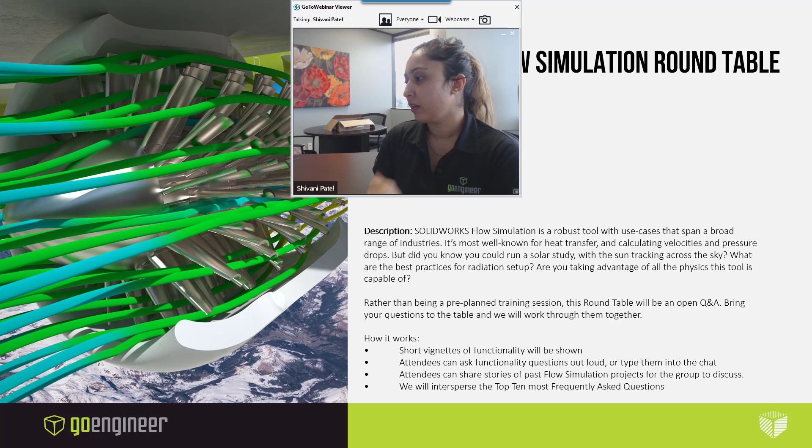Let's go ahead and get started. So there's kind of some options for you. So for option number 1, I've kind of listed out our common questions that I get asked before somebody owns flow simulation, after they own flow simulation, and then some various vignettes of functionality within the program, things that I think are less used but could be interesting to some of you. Again, these are just options.

So what I'm going to do is put up a timer for 1 minute, let you guys start typing into the chat and either voting on one of these 15 topics or typing in your own topic, and we're going to start from there. So because this is more of a loose type of webinar, it's not structured beginning to end. I want you guys to get what you came here for, get out of it what you came here for, so the more you put in, the more you get out, right?

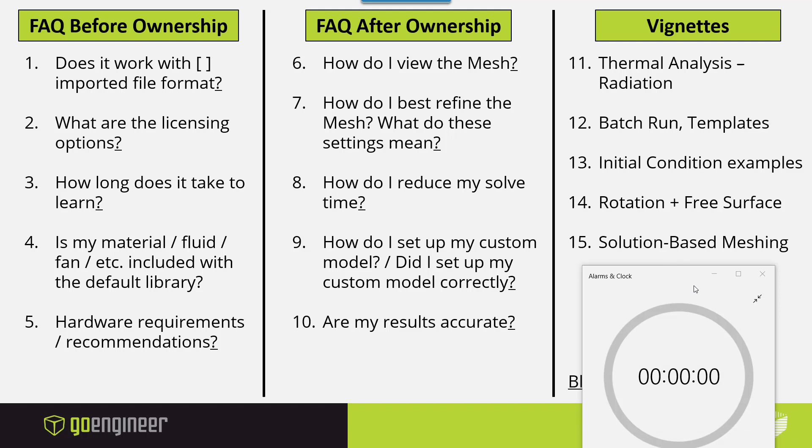Perfect, thank you guys. So we'll have time to do more of these votes after. That's not the only time you're going to be able to vote. Anyway, the one that seemed to win, a lot of them got only 2 votes. So we're going to start with the ones that got the most votes here. So I'm going to do 9, we'll do 10, things like that. I've got my tallies here. So, absolutely 9 is the one I get asked the most often.

I have this specific study. There's specific questions I have on it. I'm lost, how do I figure out if I set it up correctly? And because of how custom it is, really the best option is just to talk to me or another specialist one-on-one. Maybe you're not aware that you can do this, but you can schedule a session with a simulation specialist like myself.

So I'll take you to our website real quick. This is, you can navigate to it through our services dropdown or our support dropdown, application mentoring session. And that's getting you to this link that I've pulled up right here.

Now, if you're here and you're scrolling around, you're going to see that they each cost $250 for an hour. That's just to kind of put a wall between a random person who's not our customer being able to access this. Since you all were specially invited here and you are our customers, just reach out to the account manager that invited you, and they can get you either direct access to a simulation specialist or a coupon code for this to make it free.

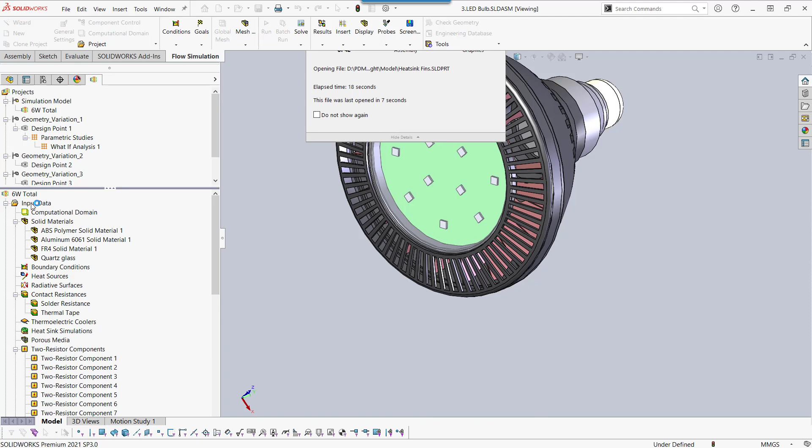So let's open up a project here. First our general settings. I'm going to right click on input data, go to my general settings, and walk through these with the customer, figuring out what do they turn on, what does that mean, what fluids did they choose, what materials did they choose, and then writing down how many times are they using something default out of our library.

What did they choose to ignore? Roughness 0 micrometer, right? What did they choose to ignore? What did they plug in? And helping them understand each of those assumptions in each choice, like black body wall as a default choice. What does that mean?

When you're doing this on your own, take advantage of the flow simulation help. A lot of SOLIDWORKS functionality is going to have this little question mark at the top right of commands, and that can get you direct access to whatever you're trying to reference. You can also go through the SOLIDWORKS help up here, SOLIDWORKS simulation, flow simulation help topics. You look up what you need to look up, you read through it, and that helps.

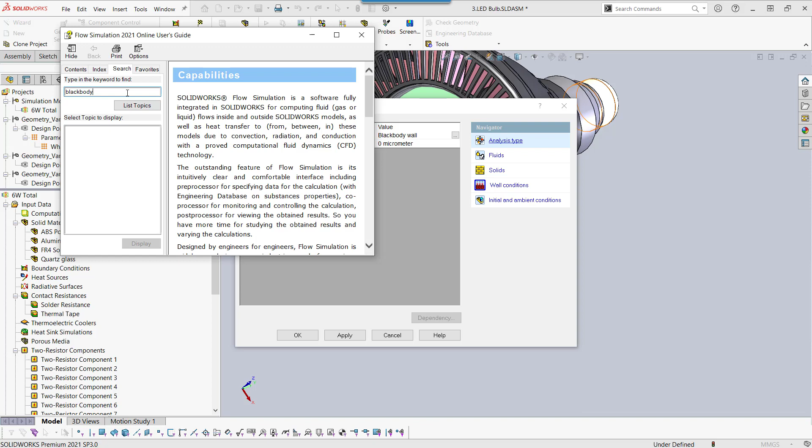Honestly, that's a great way to learn the program. What about this did I not understand? Okay, now I understand what they mean by black body wall, what it means when it's a default, that type of thing. Hey, not every answer is going to be in here.

That's where GoEngineer comes back in. If you are not able to find the answer you want in the supplied technical information, shoot us an email. You can reach out to your account manager, or our support team has an email and a phone number available on our website. You can find that here. So you can call us, you can email us, and if we can't directly answer it through some extra information that we have access to, we'll contact the Flow developers.

And that's how to check your assumptions, figuring out what Flow is actually doing. I think those steps will get you very far.

What's the next step? So after you check your assumptions, I mentioned... GoE support, okay, customizations. So what did you choose not to customize? What did you customize? If I'm concerned about what somebody customized, a custom fan, curves let's say, a custom material, custom fluid, I'll take them back to default.

And again, if you put in something custom, a custom fluid, a custom material, of course, whatever you put in, you put junk in, you're going to get junk out, right? So we want to make sure we understand what we're putting in. That's where the help comes in. That's where GoE support comes in. Make sure you understand what data you're putting in, and then interpreting your results.

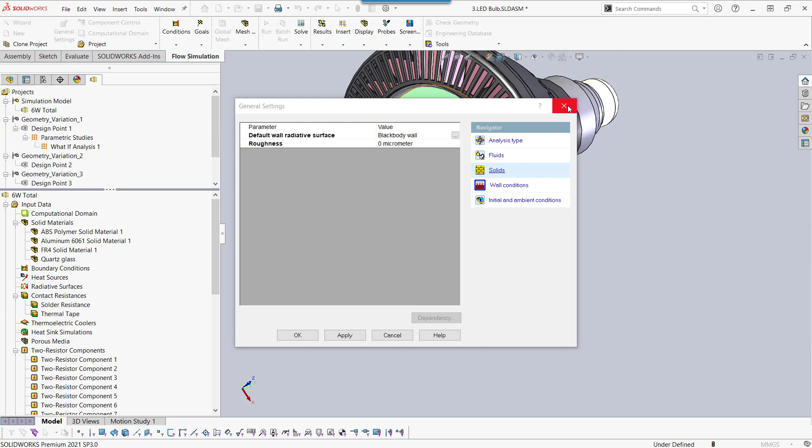So with that, I mean, are my results accurate? The best way to answer that is, well, you have to go through your assumptions and list them out. What do we understand? What do we not understand? If you don't understand something, you reach out to us. That's kind of the simple answer there.

And then making sure the materials that you type in, the fluids you put in, are the defaults okay for what you need, or do you need to go put in something truly accurate to what you're analyzing? So putting in those customizations.

The last thing, bullet point here I have is validation problems. So as you are getting used to it, if you're brand new to the program, Flow Simulation does come with a technical reference guide or an online tutorial guide, which can walk you through some standard setups. This can help with training, as well as proving out a concept.

For example, how does fluid flow react behind a cylinder? Kind of matching up with hand calculations, comparing that to the fluid calculations and how to set that up. Understanding how to do it properly can help you understand how to set up your custom model properly. That's validation problems.

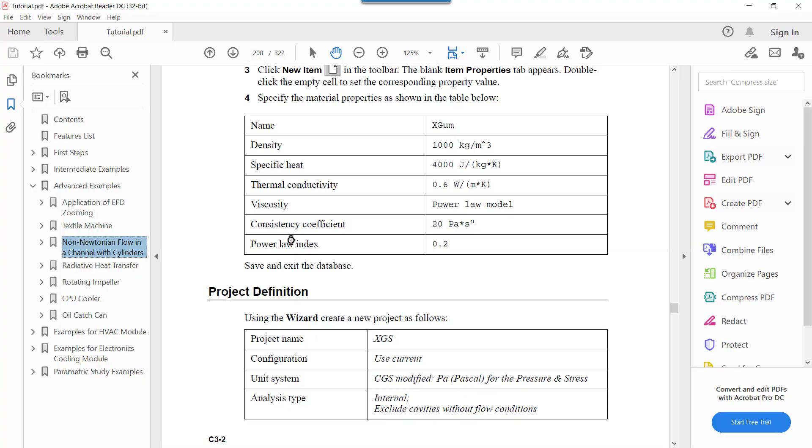Again, that's access to the help dropdown. Now, that's just some high-level answers, some specific answers, depending on what you're trying to analyze out of Flow.

This top right-hand corner, I can't show you the actual example because it's a customer example, but it's a thermal calculation with radiation. They did an experimental test with thermocouples on points of the model, and we compared that against a flow simulation study. You can see the range here is the kind of standard accuracy I'd expect when a flow simulation is trying to match a thermal analysis. We're in that 1 to 3 degree range, okay? That's what I'd expect to see from a thermal analysis.

If you're not getting it, of course, we're here to help.

Now, here in the bottom left-hand corner and at the bottom, this is more about lift and drag. We're talking about CFD, pressure effects, fluid flow effects—that's one question, but lift and drag is a very specific type of application. It's very reliant on the type of turbulence model that you have. So what turbulence model does Flow Simulation use?

When we're here in our general settings and getting to our last step, turbulence is kind of default chosen. It just says this turbulence intensity and length thing—turbulent energy and dissipation. If you searched that through Google, that would be called the K epsilon turbulence model. K epsilon is a really good general use case.

It's very stable. For lift and drag in particular, it's good for low to mid angles of attack. This has been tested against wind tunnel data, so you have some proof. This is flow simulation, by the way, on a drone, tested in a wind tunnel.

The coefficient of lift, our lift results, match very well from -10 to about 5 to 10 as an angle of attack. As you reach those higher angles of attack, where you have higher pressure gradients, we start to underestimate that lift. We start to lose track of the accuracy there.

Something else I want you to notice: drag. Our drag results tend to have a pretty significant deviation. By that I mean they'll match pretty well at very low angles of attack, maybe -5 to 5—pretty close. But as you get higher than that, you have a pretty big deviation. We're going to overestimate the amount of drag on the object, and that overestimation increases the higher the angle of attack becomes.

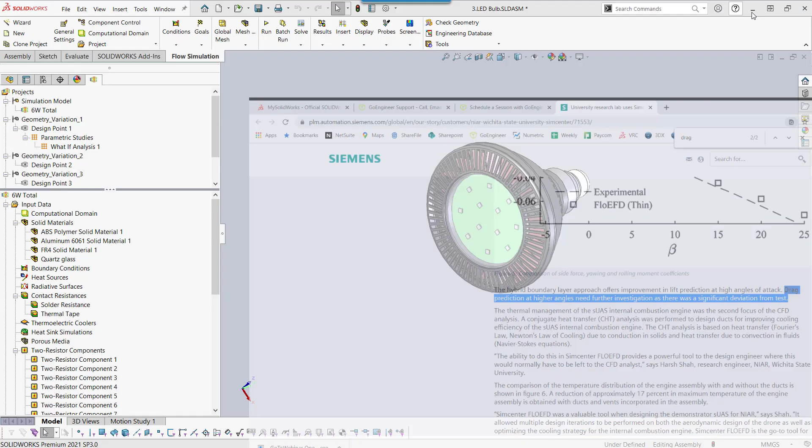Now, if you haven't bought Flow Simulation yet but you're looking at it, and your purpose is to get really accurate lift and drag, have access to a different turbulence model. Don't go with Flow for the K-epsilon. K-epsilon is great for low to mid angles of attack, right? You just saw that. But if you need something more specific, a wider range of uses, we have other options for you. That's not what this webinar is about, but know that we can help you.

Okay, that's the 'Are My Results Accurate?' topic. I saw some questions pop up—some custom stuff, environmental temperature, radiation, compressible, incompressible. Perfect, okay, so that's not related to the Are Results Accurate question. So let's go ahead and take a look at some of the custom questions that popped up, and then we'll get back into the standard stuff I went through.

All right, I'm going to just copy and paste some of these questions from our Q&A. Okay, thank you for holding on there. So let's start from the first custom question that came in: how do you model a pressure vessel being emptied? Okay, I'm going to show this to you from scratch.

The basic concept is something called free surface, and that's a type of physics we can turn on in Flow. The second component to this is taking advantage of the transient piece and initial conditions. And then we're going to do a shell—simple pressure vessel, and it's empty, like so.

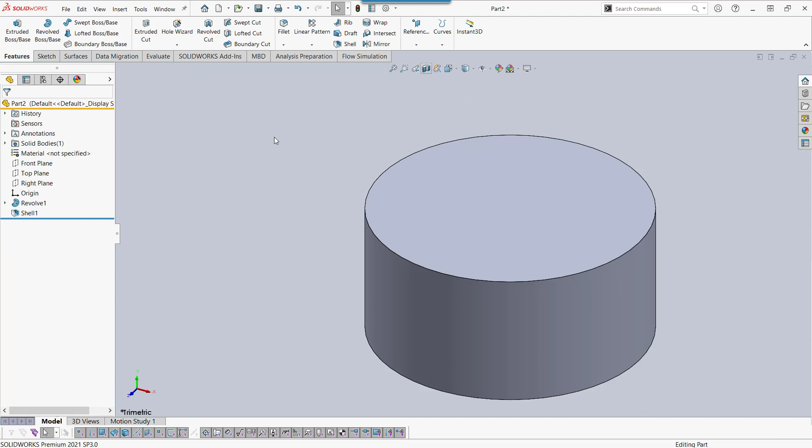So we have two ways to look at this. Either we have the whole thing filled with fluid like water, and then emptying at a specific flow rate at the bottom—we can define that flow rate—or we just leave it as an open channel, open air, and it's emptying like a bucket. Two ways to handle that.

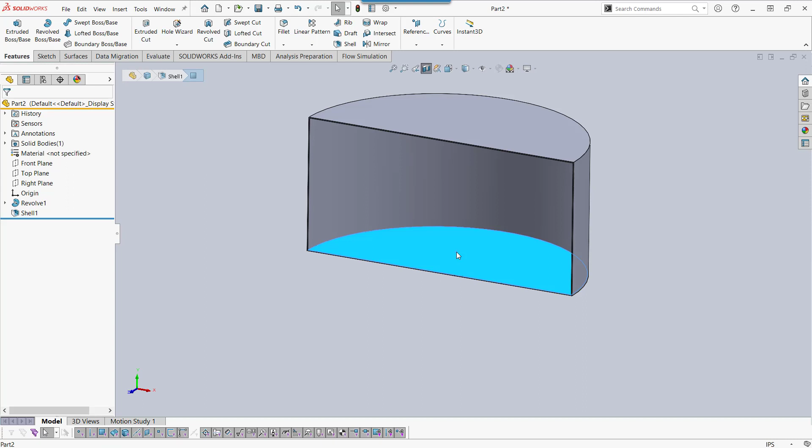If I was going to do the flow rate way, I would just have an opening like so. I would use a split line or some sort of lid to define where that outlet flow rate is—kind of like that. So initially filled with water, what's the outlet flow rate? It'll empty. Now the special part is needing that free surface condition where there's air and water in the same chamber.

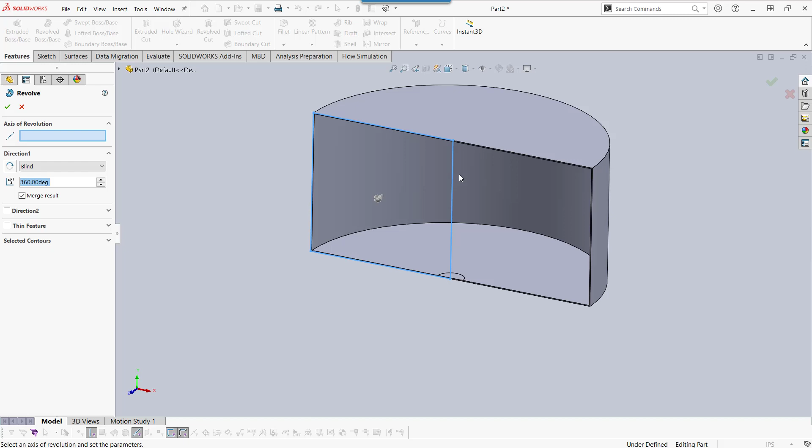So to finish up that, I'm going to create one more separate body to be the initial fluid of water. Yeah, we'll just do this—I don't want to merge the results. And just to make this obvious what I'm doing, I'm going to shift this downwards just a little bit, and make it a little bit shorter, so we have a little bit less water in the tank.

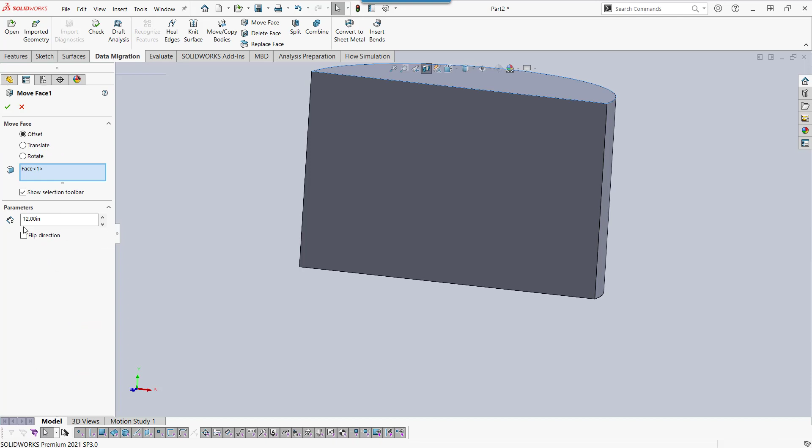Let's do 1 foot. The other way. Okay. All right.

Now for the setup, you go to Flow Simulation. I like to go through the wizard just because it's the easiest way to set things up, honestly. I've been doing it for so long, I still do it that way. Let's drop this to the desktop. Okay, so starting with the wizard, come on.

We're going to go through our 7 steps. Really the big thing is turning on the correct physics. So at the physics choice, with my current way that I set this up, I would call this internal. I'm just going to drain out into invisible space. External, you could choose if you actually had a channel opening, a cutout at the bottom, and it was going to flow through, okay? But internal, for now, just going to flow outwards.

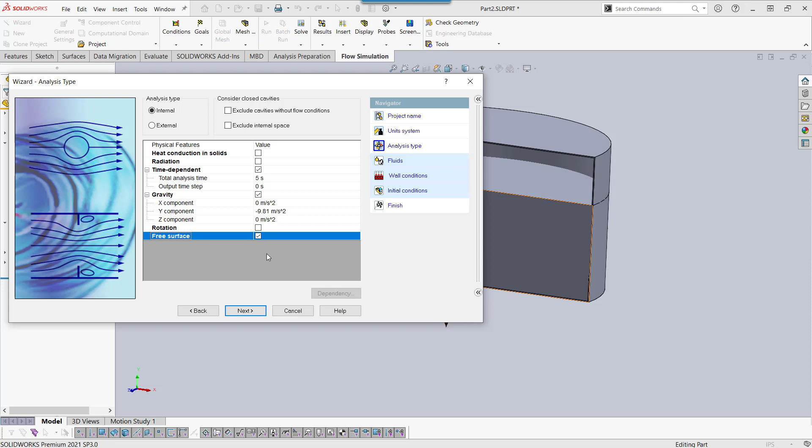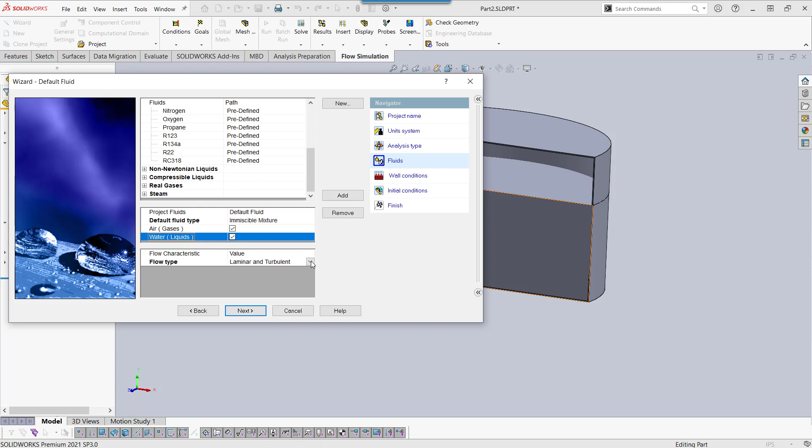This is what's going to allow you to have gas and liquid in the same chamber, air and water. Next, as I get into this part where I'm choosing my fluids, you need to choose a gas and a liquid, or a gas and a non-Newtonian liquid. That's the mixtures that we can do, or liquid and non-Newtonian liquid. So those are the 3 combinations you can have. You make sure you've selected both.

Kind of go through the rest of the wizard, doesn't matter as much this stuff. When you get to initial conditions, it's going to assume the air is the first thing, the gas is the initial fluid, and that makes sense. You want to leave it like that, you want it to finish, and right now it assumes just that little top gap area is air, and then this water thing is all solid, like metal or something like that. So that's not what we want.

So then you come into something called initial conditions. You can set that up from your project tree. I tend to use this tree a lot just because it's what I'm used to. You could also come up here, there's lots of stuff in the menu bar, right? So, initial conditions. So I'll drop that in. I would pick that whole volume to be my water.

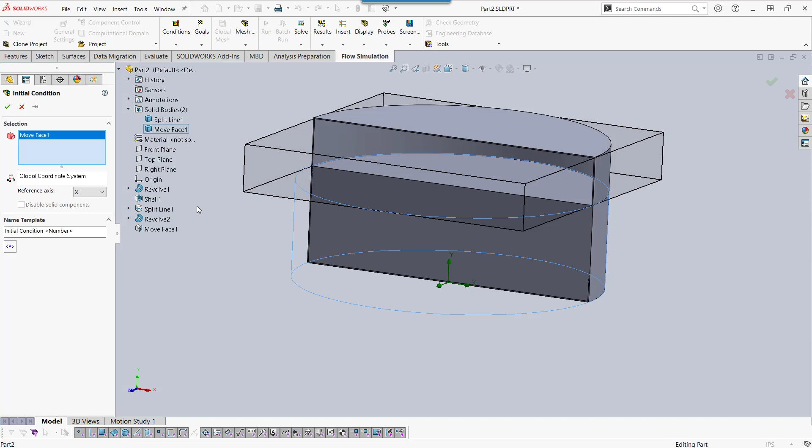I say disable solid components. That gets me access to all of the initial conditions that would be there for a fluid. So I'm not going to do velocity or anything like that. It's not traveling on a road. But I will say, hey, it's initially water. This is the initial pressure and temperature of the water. Turn on gravity effects due to the weight of the water, and good. That's great.

Now, my initial conditions for this vessel are partially filled with water, partially filled with air. And as I run the study, I'm just resetting this. As I run the study, it could empty. Really, the last step at that point would be doing a boundary condition. Whatever your flow rate or pressure is at your outlet, you'd go put that in at the bottom or whatever. Okay? That is how you would set up a tank emptying.

Environmental temperature is based on cloud cover. So you guys do a lot of solar analysis, or the sun's modeling, tracking across the object. Is there any sort of, what would you do for environmental temperature, right? Now,

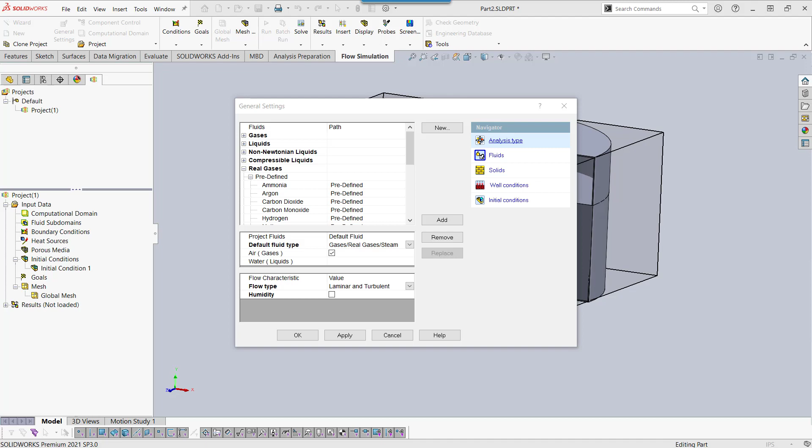So I'm looking at the questions while I'm answering. Let's look at these next ones in the list, and type in more if I didn't answer your question correctly, or ask to unmute, that's fine. So the next couple questions that came in have to do with contact resistance, when to use it. It seems to be built in certain scenarios. That's true.

Let's go back to this model. So two resistor components, they're not factoring in the contact resistance between the chip and the board, okay? They're only factoring in the resistance inside the chip itself.

Let's talk about what a two resistor component is. It could be a very complex shape, right? And we're simplifying this down into a simple rectangle with perfect touching faces and that whole shebang.

So when we're creating a two resistor component, we're putting in that thermal transfer, which is a combination of the conductivity and any other contact resistance that's inside just that two resistor component. So this is just about what's inside the two resistor component. If you're putting it in manually, yeah, you could include the glue that goes between it and the PCB. You're just simplifying your use case, but you don't have to combine it here, okay? So two resistor components, it's just what's in the component.

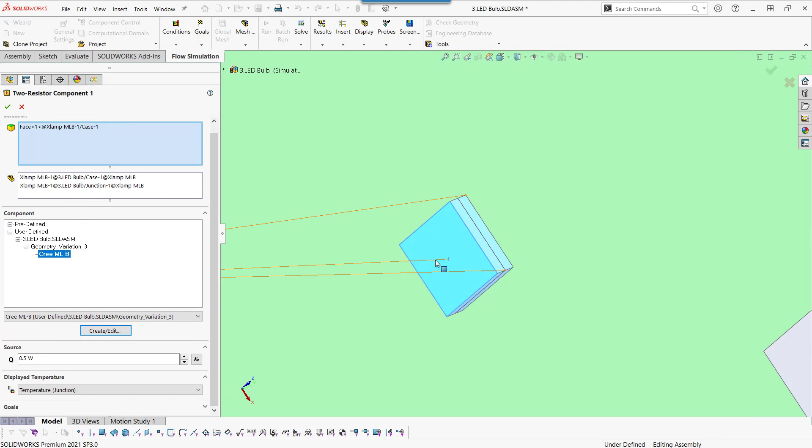For when you should use contact resistances versus, this is actually a twofer, a two resistor or a contact resistance versus a thermal joint. Those are the two options you have for telling flow how a part file is interacting with the part nearby. Contact resistance or thermal joint. Contact resistance is meant for when part files are face to face, they are touching, they are coincident with each other. That's when you use contact resistance.

And when should you use it? Pretty much anytime you have material data for what's in between two parts. I talked about that 1 to 3 degree accuracy on that thermal analysis we did. We made sure to put in contact resistance for all the big heat generating and big heat transfer components.

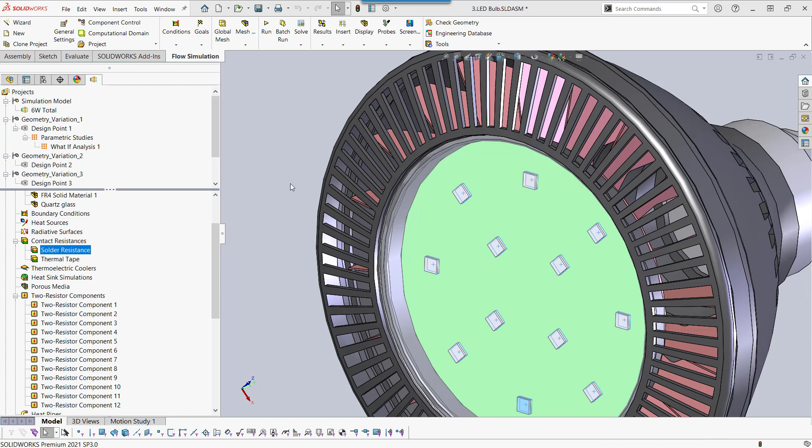As an example, do I have drawing tools? Let's leave that example to the side. So if the part files are touching and they are adding a lot of heat to the system or transferring a lot of heat to the system, I highly recommend you put contact resistance in. And again, they are meant for just the touching faces.

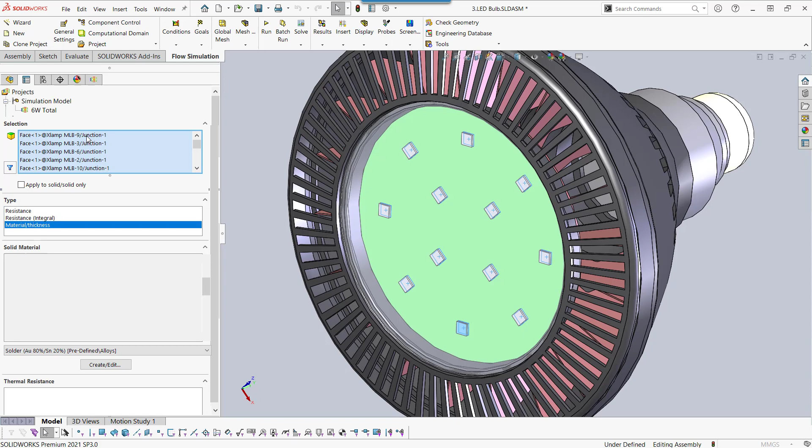Now, something I want you to notice here, at the bottom of these chips, I did not also click the face of the PCB, right? I just clicked the face on the 2 resistor component. Every face that you select in this tool, it's like it's being painted with the glue or the solder or whatever you put on. So don't select 2 faces between the components. By that I mean don't pick the 2 resistor component and the PCB, because now you're painting that resistance on twice. Okay? So just 1 face.

Now, when should you use the other option, the one I said was the other choice, thermal joint? If you look at that icon, it's 2 part files separated by a gap. So you should use thermal joint if you have 2 part files separated by a gap. It's going to pretend like there's a part file that you modeled in with whatever resistance or heat transfer that you supply. So thermal joint to represent a larger component you didn't model in, or a thin component you didn't model in, contact resistance for faces that are touching.

I guess the second question, heat transfer from a bolted interface. Let's say there's a diameter of that bolt. How to best model the bolt and make it easier to mesh. Rectangles, circles, similar areas for the bolt, that type of concept.

Okay, so if I think about a bolt, they kind of remind me of a via, a via on a circuit board. So there's kind of multiple pieces to this conversation. I'm going to start with the first piece. Let's just draw, well, that's not a rectangle.

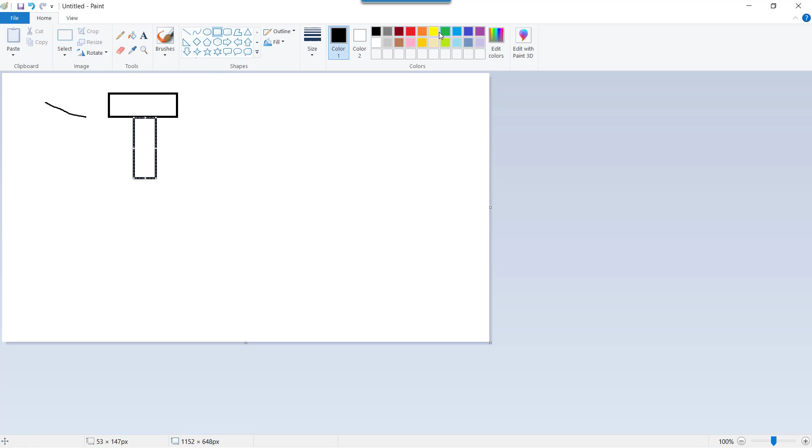Let's draw a bolt on a side view going through some PCB stuff. Maybe multiple layers, and then there's some part file down here, and it's either threaded into the bottom or a washer or bolted into the part. A via acts pretty similarly, connecting between part and part.

A simplified way to represent this without having to mesh it is using a thermal joint. Consider this a side view. Now I'm going to draw a top view, looking down on my board.

I would do a split line in the shape of the bolt, the diameter of that metal component touching the PCB. Then on the bottom view, I'd do the exact same thing for whatever that bolt is connected to.

Then with the thermal joint, I would connect this face to the bottom and tell it the conductivity of metal. That way you don't have to mesh the bolt. I've forced the conductivity of the metal here, like this.

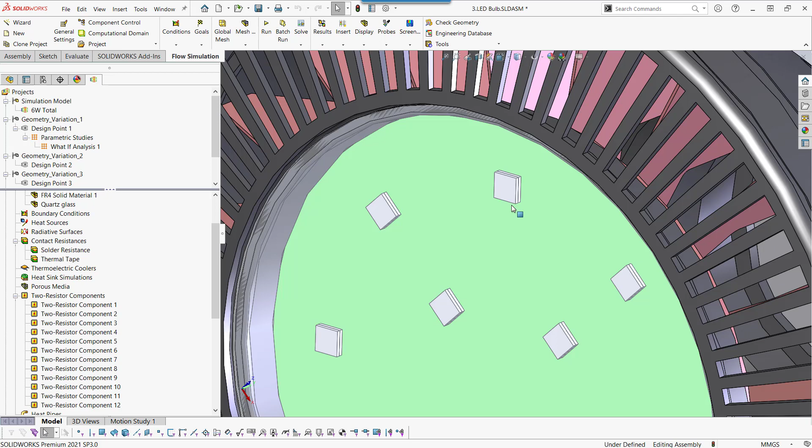Flow Simulation meshes square shapes better than round shapes. Round shapes will end up needing more mesh to capture the geometry. So if you can represent your bolt as a square instead of a circle, it will mesh easier with a lower mesh count and faster solve time. First recommendation: thermal joint. Second recommendation: square shapes if possible.

Someone asked a question relating back to the bad tank I drew, with the water overlapping the edges of the tank—is that going to be a problem? In this case, no. It just matches the solid level exactly, so it's not going to try to inject water into the solid body at all, so overlapping is fine. Flow Simulation is pretty cool with overlapping stuff in general. If I had it sticking outside a little bit, that would have been the problem—it would have flown off into space and been confused. So overlapping is okay in this case.

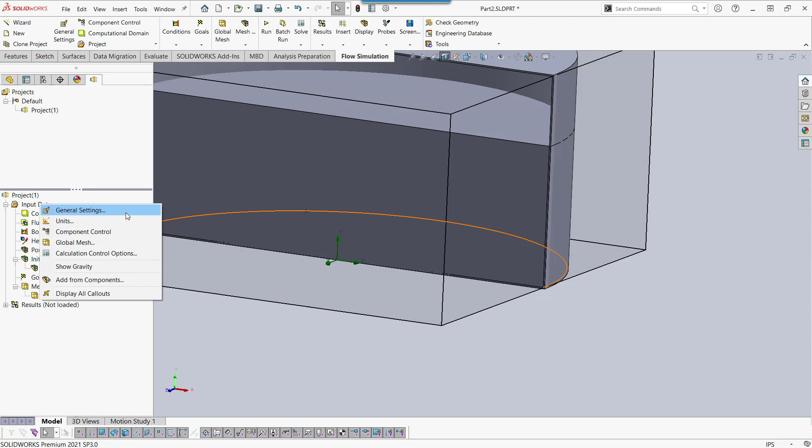Another question, I think going back to the cloudiness question: is the environmental temperature different from the ambient temperature somehow? No, there's really only one place you can put in an environmental or ambient temperature, and that's here in your general settings. You put it in here—that's your environmental or ambient temperature, and that's the same thing.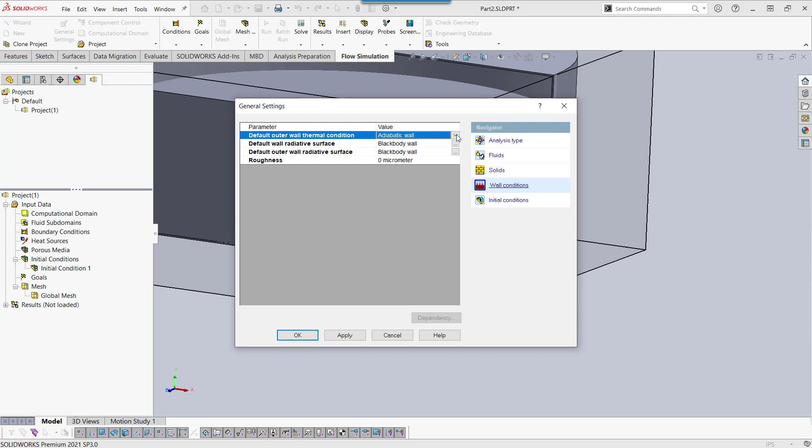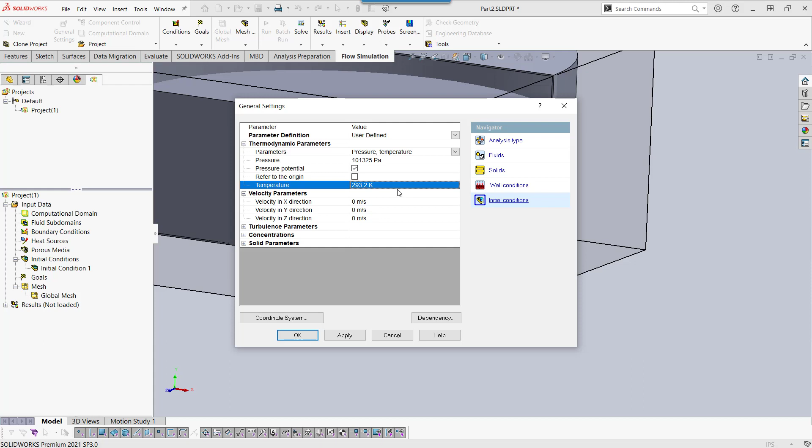I wonder if there's some other temperature you might be talking about. Let me come back and look at the solar study again. I don't see a place I'd be overriding this—maybe here, but that's the same thing. I believe you're talking about this area of the general settings and the environmental temperature. This is treating this as the ambient temperature, the environmental temperature—all the air around the object, anything that blows in is going to be that temperature. I'm not sure if I answered that one, but I'll watch out for more questions related to that.

Let's do a faster one, and then we'll get into these custom ones. We had a couple of votes for the vignettes. So a faster one: does it work with whatever imported file format?

The most common question I get asked is whether it will work with some other CAD modeler or program that I have. Usually the answer is you're going to have to import that as a STEP or IGES file. The nice thing about Flow is it's just in the SOLIDWORKS interface, so whatever power SOLIDWORKS has to import a file type, Flow Simulation can use it—it just has to be in the program. So the question really is, can SOLIDWORKS import it? If your question is, can Flow use some blank file type, just see if SOLIDWORKS can bring it in and make a solid part out of it. Generally that's STEP and IGES—STEP or Parasolid is preferred.

A lot of people are using Flow Simulation for electronic circuit boards, PCBs. There are programs out there like Altium that have direct connections to SOLIDWORKS, and they can also export step - I've seen that in action, so that's always an option. With Altium, there are connectors called PCB connectors, where your geometry inside Altium can connect to your geometry inside SolidWorks. If somebody makes a change in one or the other, the program can be updated, so it's all like a live connection. But same thing, you're kind of working with SolidWorks part files as well. Just another option for connecting that data.

It's when you have surface bodies. When you import a step file, you can have an issue where not all the geometry gets imported properly. So the step file brought in, but there are some errors - you can see that here on the left-hand side. Let's focus on what's going on here. I've got solid bodies, which is that piece - that imported properly. It's a 3D solid, it has volume. I could technically run flow simulation on this.

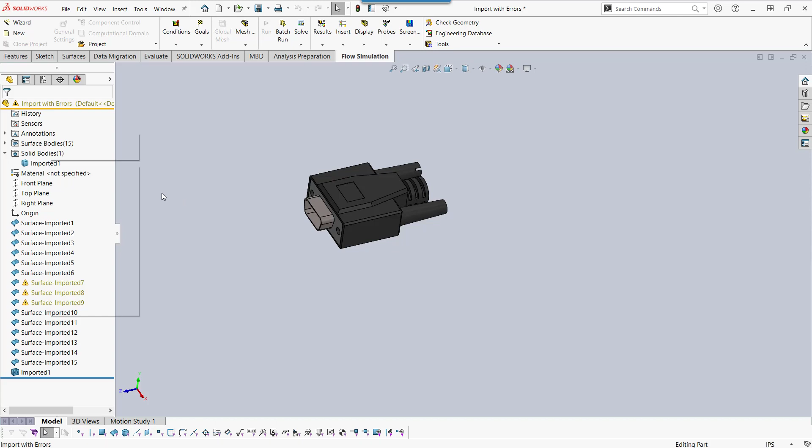Now the other pieces broke during the import, and they're surface bodies. I know that because they're under the surface bodies folder. I also know that if I isolated one of these components or bodies, they're not going to have any thickness. They've got these blue edges by default - no thickness. Flow simulation has no idea what to do with a part that has no volume, so it's going to completely ignore it. It can't mesh it, it can't do anything with it.

What are good ways to learn the software? That's a different version of this question, number three, and that's kind of what I was leading towards with this one. So let's focus on how we would learn this. Let's start with what's available to you right now that's free, that you don't have to pay for.

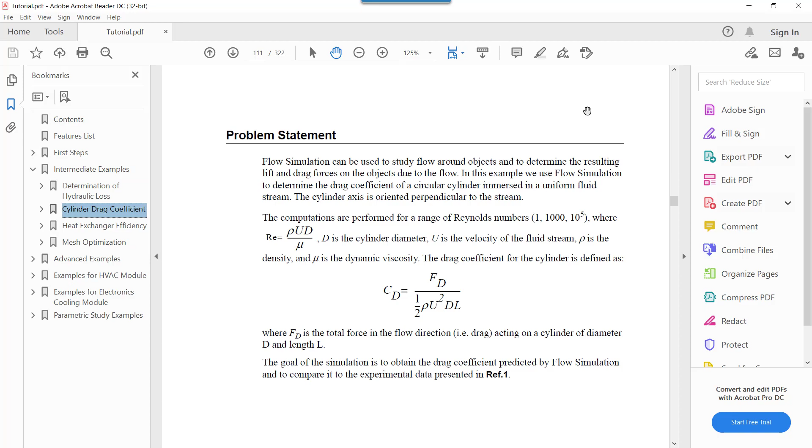Starting with tutorials - we had talked about this before. You go to Help at the top right, SolidWorks Sim online tutorial, and that's a very long PDF with 15 to 20 examples. The part files come pre-downloaded on your computer. You can walk through them, get a baseline understanding of flow through this. It's plenty to read as well - they're going to explain why they're doing what they're doing plenty of times throughout the process. That's background info, piece number one.

I will say that when I first learned SolidWorks, I was going through tutorials, and it didn't help me that much just because it was so perfect - perfect little examples that I followed instructions for, but it didn't help me understand what do I do when I have this custom situation come up. And that's where Crash Course comes in.

Let me not forget my.solidworks. So my.solidworks is SolidWorks' database of free training material. It was the SolidWorks forums, which are now accessible through a different portal, but they are here as well, where you can ask the community questions. It's another free resource. To get access to more information, I recommend you create a login - you can have a login for free, it doesn't cost you anything. There are different levels, you could pay for higher levels, that is true, but you can certainly have access to the free stuff with a login.

Now what you would do is you'd go to training, and you'd search Flow Simulation.

I can see I've got 10 lessons and 1 learning path to teach that program to me. Let's go to the learning path. The e-course costs money, so let's go to the learning path instead.

This is made up of 10 lessons. You could go top to bottom. That's supplied to you as long as you have a login. You can watch them; that's about an hour and a half of training. It's kind of a crash course, enough to get you dangerous with the program.

Let's go back here. My favorite way to explain this is through one of our training files. I'm going to pop up this regulator valve. This is a valve—it has a perforated cylinder through the center that's going to regulate the flow rates. That perforated plate at the center has a varying range of holes, and because of that, some of the holes don't get captured correctly when you do the default mesh. So how do I view that? Let's first do a section view so I can show you what that looks like.

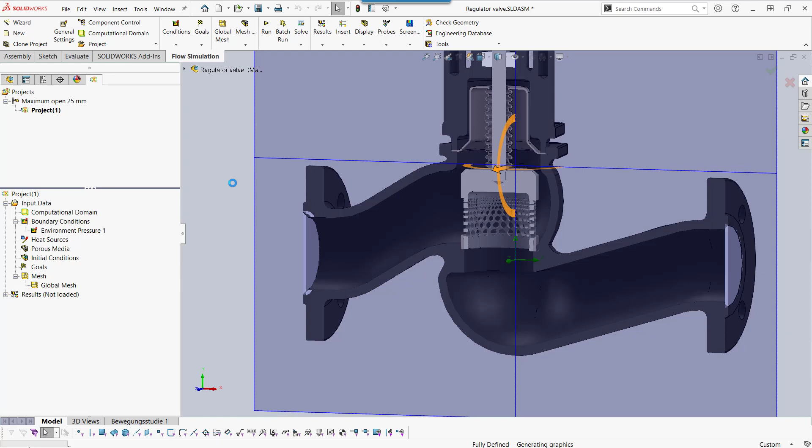Okay, so lots of holes going on here, flows going through. I haven't run this project—I don't need to do that to view the mesh. All I do is right-click mesh and say create mesh, and that generates the mesh file with whatever settings I have by default. Now that I've generated it, how do I look at it?

Well, I want to make sure the mesh is good through this component. In my results area, I've got two ways that I can look at that: this mesh area and cut plots. Let's start with mesh. Insert.

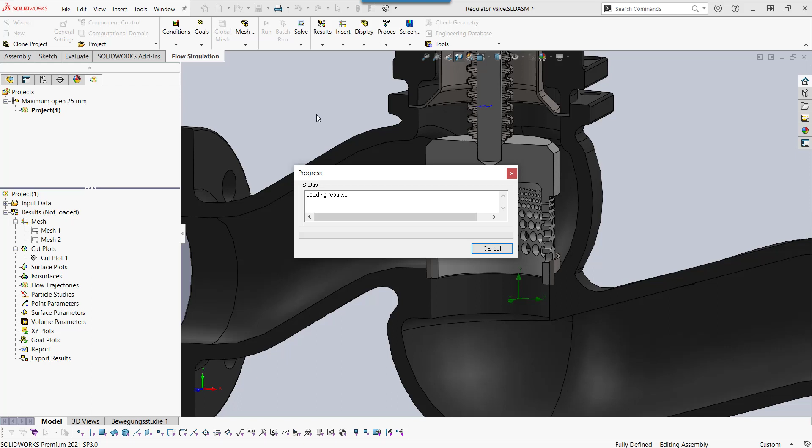This one has a requirement—you've got to select surfaces. So I have to select a surface of my model like this. I cannot go through and select some standard plane like a front plane—just can't do it. I can only do surfaces of the model. I'll go ahead and hit OK. I need to load in my mesh, and show you what I just generated. Okay, let's try this again. Insert.

On my surface... okay, a little bit choppy looking. Let's do a cut plot or a section cut as well, crop region, that way I can see a little bit clearer what I'm looking at.

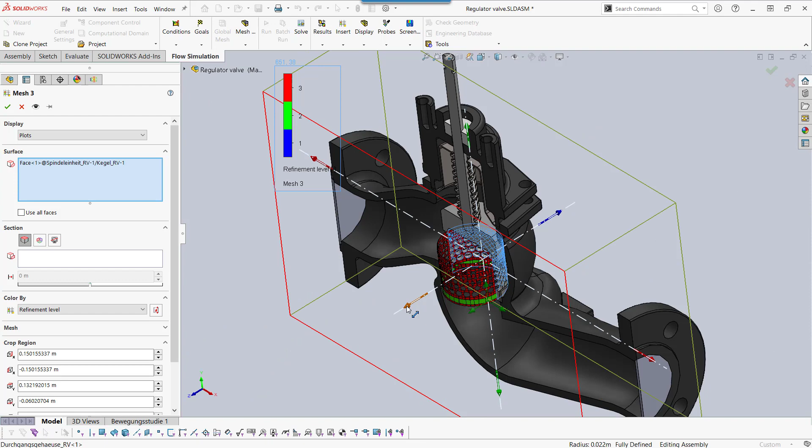So you can do this to your plots. You can always crop them to make them easier to understand. Okay, so what is this plot telling me?

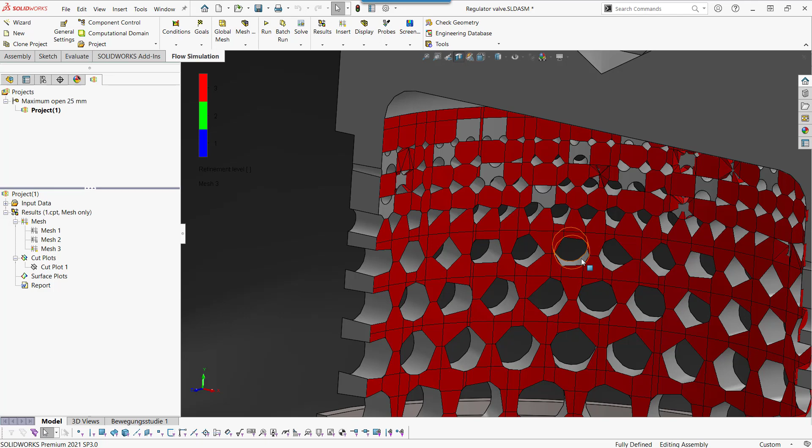Well, if I'm looking at the way the holes look, they look pretty terrible. This is saying this is what the flow simulation solver sees. This is what the mesh looks like around those holes. It didn't get small enough to capture the small holes at all. Pretty chunky looking.

There's also a gradient here, refinement level 1, 2, or 3. There was some automatic refinement that happened that just pulled up in my default settings, and so some areas are 2 times refined or 3 times refined. What does that even mean?

We'll get to that. Now, what's the second way that I could view my results? Cut plots. This is the next most common way you're going to do it. You're going to pick a plane or a face, and this is the way you choose a plane, because in the other type, you can't do planes.

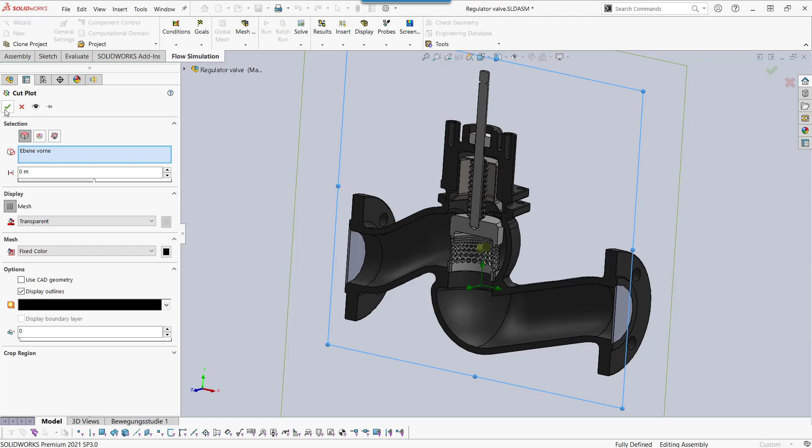And remember, this is that thing I told you to, please don't forget this part. Uncheck use CAD geometry. It's in your options. Uncheck that. That's going to tell you what the true mesh looks like, how flow simulation is actually seeing the part file.

Let's focus on this area. That's definitely a funky geometry. I'll hide some stuff.

Okay, look at that a little bit closer. It's not terrible, right? But you can see the chunkiness around that kind of smooth, curved geometry. And so that's another clue that that geometry didn't get captured well. And so then my next step would be refining the mesh in some of these areas.

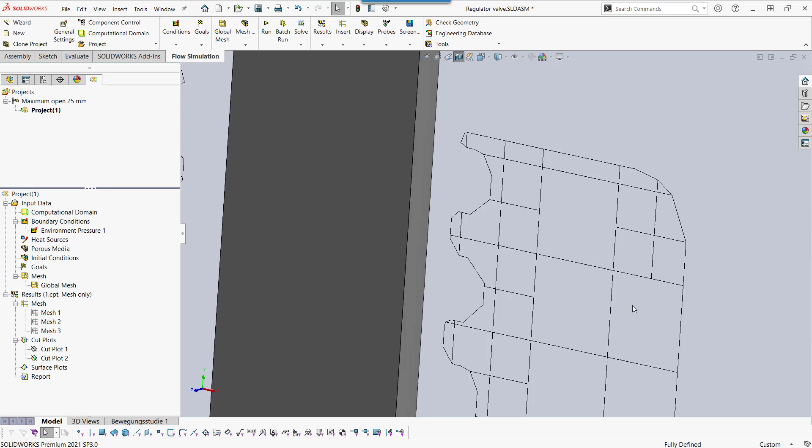So getting into how to refine it. Because that's really the two ways to view it, and that really handles that first question. So how do I then refine it? Let's go through some vocabulary first.

Okay, basic level vocabulary. A mesh inside of FlowSim is a big cube. Level 1 or level 0, just some big old cube around the object. You can kind of see that here in this picture. When you go to level 1 or 2 or whatever, it carves that cube up into 8 smaller cubes, just divides it in half a couple times. You get 8 smaller cubes.

So very quickly, you can blow up your mesh size. So we don't want to throw this all the way up to 9 immediately, pretty much ever. We want to be careful with what we're doing. So that's basic level vocabulary there. So let's take that knowledge into making the mesh better for this little piece down here.

Okay. Meshing. So I'm going to right click on mesh and go to insert local mesh.

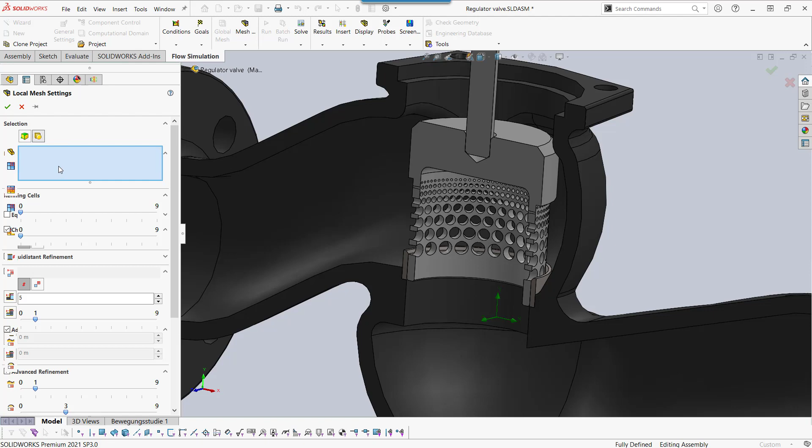Here you have two options. You have this first icon, which is telling me I can select components, faces, edges, or even a single point to apply all these settings to. Then I've got this one, which is you create a Boolean shape around your geometry, either a cube or a cylinder or something, and then again set up all your settings inside that Boolean shape.

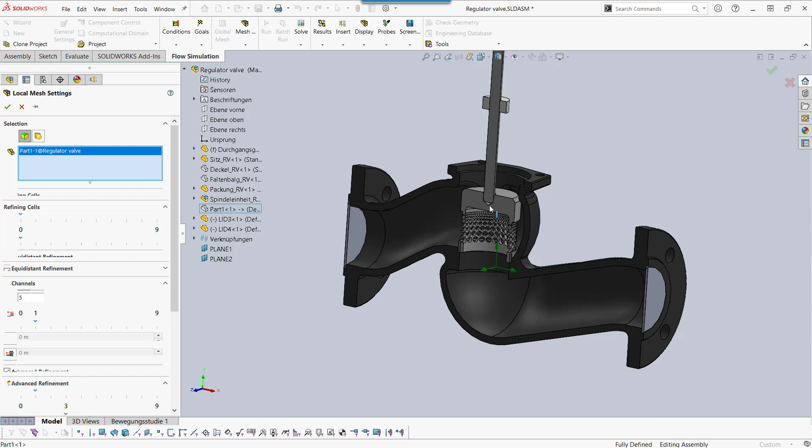Okay. With this model, we pre-modeled in a little part file that just encloses the holes over here. So I'm going to go and pre-select that to just be looking at this area.

Okay, and like I did say, this does take an hour to talk through all these different choices. So I'm going to give you the high-level answer. High-level answer,

you're brand new to remeshing in Flow. What do I pick? Stick with these top two choices. Fluid cells or fluid solid boundary. They are what they sound like. I bet if I quizzed you right now, you'd all be able to guess what it means.

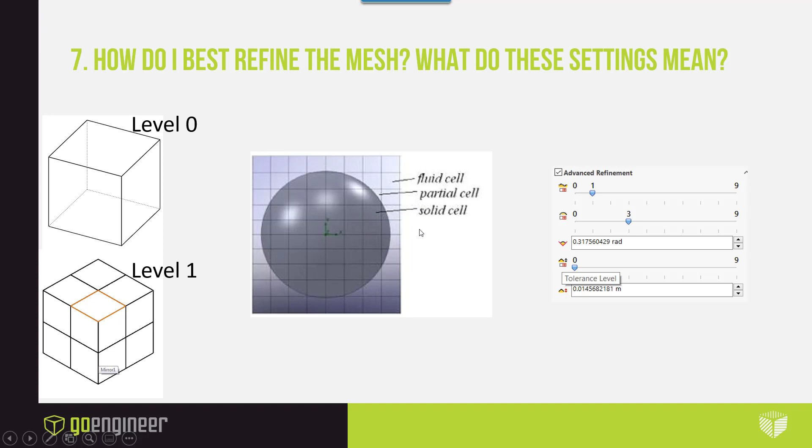A fluid cell is a cell that only touches the liquid or the gas or whatever. A partial cell touches both. It crosses the boundary, partially solid, partially fluid. And then you can have full solid cells for doing like a heat transfer study where it's only in the solid.

So when you're getting started, you're going to mess with these sliders. What do you think the numbers mean? They mean level 1, 2, 3, 4, 5, right? Just like we were talking about before. It's carving up that cube 1 time smaller, 2 times smaller, 3 times smaller.

How do I see what it looks like? Take advantage of display refinement level. You can get an idea of what it's going to do.

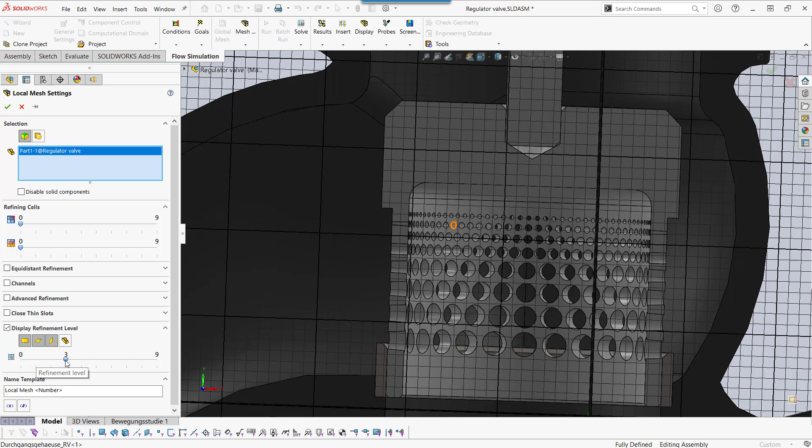So looking at it like this, that's level 0, my default. We know the circles got down to level 3 with my default options, and so this is the type of cube that was around those circles trying to capture the curvature. No wonder it was so bad. What might be better? 4, probably even smaller than that. 5 is probably the biggest I could go to capture some of these smaller holes.

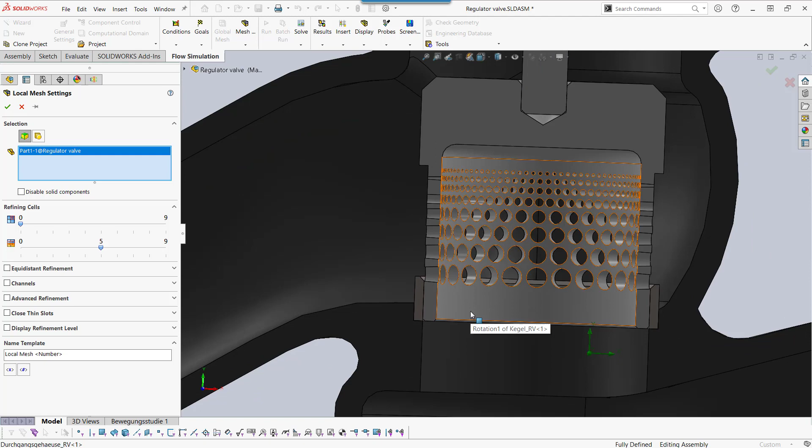Having decided that, I now have to go select that here. It's going to make it 5 times smaller. Okay, so that's you getting started. Now what's the downside to doing this one? Every single face, even the ones down here that don't really need it, are going to be 5 times smaller. And that can blow up your solve time, right?

So that's where these other options come in and why they exist. These ones exist so you don't have to be so global, and you can really narrow down what you want. The place I go most often is advanced refinement. And yeah, there are a bunch of options here that look intimidating, but they really aren't too bad. The flow help does explain them with pictures and examples.

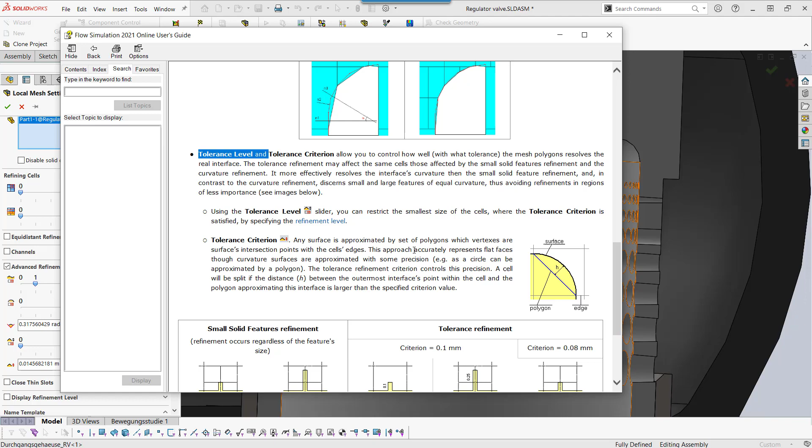You can see that here. So small solids, what is it? Curvature, what is it? How does it apply? Tolerance level, what is it? I'm here to give you the high-level summary. The high-level summary is tolerance is your best global choice. It's the one that's going to handle it the easiest, so you don't have to be as particular with curvature or small solids, okay? So tolerance, you don't have to be as particular. It's the one I recommend. Followed by curvature level. So tolerance first, followed by curvature level.

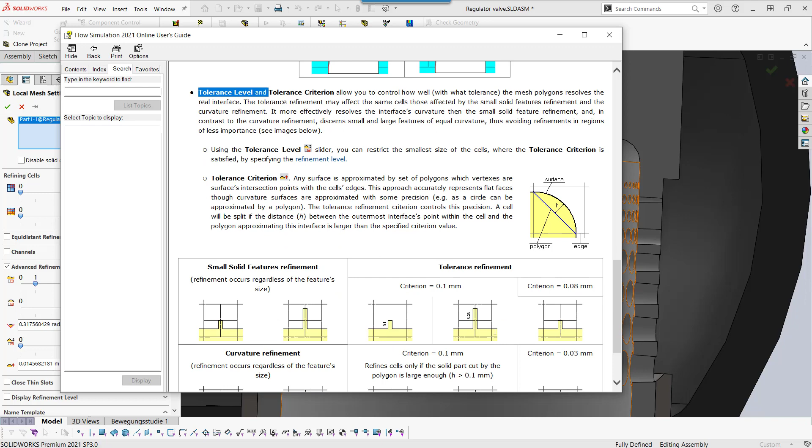The way tolerance works, if it notices that there's a very big difference in the shape of the geometry versus the mesh, it'll refine it. And whatever that error is, we are defining what it's allowed to change. So let's say the error is whatever, it's going to compare it against this number. If the error is greater than that, it'll refine the mesh. If it's less than that, it won't.

So what I would do, I would set up at least a refinement level up to 5, and then I would give it an error that made sense for the size of some of these holes here. Let's start with the default. Hit OK. And then I'd remesh and I'd recompare. I'll go ahead and give that a mesh, but while it does that, I want to look at the questions again. Feel free to type anything in. We can go back to that. Otherwise, after this, we'll get into some of the other vignettes that you guys had requested.

Do I know if SOLIDWORKS Flow will incorporate fluid structure interaction at some point in the future? It's a fantastic question. I am fairly sure they are not going to do it because of that other program that is going to be able to do it, that other thing that we offer.

How do I show this again? Let's go to our website. So there's kind of two CFD tools in the SOLIDWORKS line. The one we're focusing on today is SOLIDWORKS Flow, which doesn't have fluid structure interaction, which is very unfortunate - it's such a thing we asked for. But also in the SOLIDWORKS line is something called 3D Experience. And this does have a CFD tool in Abaqus, which will have fluid structure interaction at some point this year, we believe, latest next year. So that functionality is coming to SOLIDWORKS users, it just won't be inside of Flow Simulation. I hope that answers your question, Edward.

All right, so this mesh finished. So we're just going to hop back in here and see the changes. And then we'll go on to the vignettes.

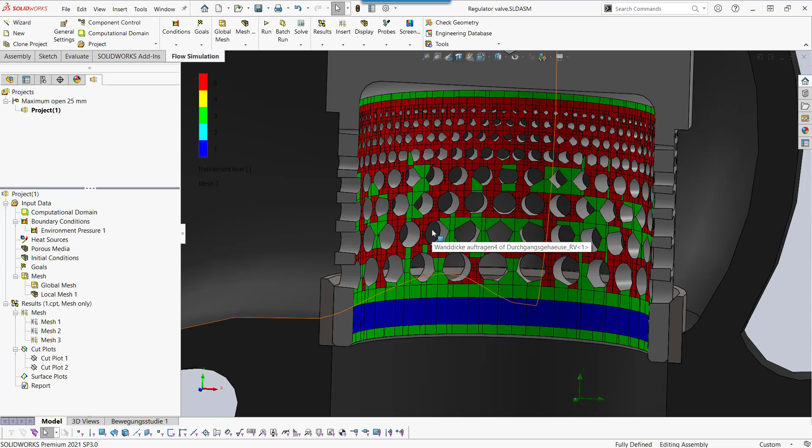Okay, so again, this is based on that tolerance level, right? Now it's going 1 to 5, so 1 refinement to some 5 over here. Yeah, it did a better job just with that tolerance level. Maybe I need to reduce the tolerance or increase the tolerance a little bit so that some of these holes that didn't get captured still get captured. And maybe go from 5 to maybe 6 or 7, because some of those holes didn't really get captured still. And that's the process - it's trial and error. It's back and forth like that, and viewing your results, viewing your mesh.

Okay, so the first thing you have to choose when you're doing radiation is in your general settings - you turn it on. Let's just say we did standard radiation, no solar radiation for now. You're only going to have one choice unless you paid for the higher choice, so you're going to have discrete transfer. Discrete transfer is great for the one that I said was 1 to 3 degrees difference - they use discrete transfer, it's great for most use cases. If you need to handle radiation through glass, like a greenhouse effect, where the glass is absorbing some of the heat but transferring some of the heat, that's where you need to pay for the extra level package, where you get discrete ordinates. Most people can stick here in discrete transfer.

Okay, as you're going through your wizard, the first thing you're going to have to choose is your default wall radiative surface. In this case, I chose black body wall. But my recommendation is to use a non-radiating surface instead. It does not take part in the radiation calculation.

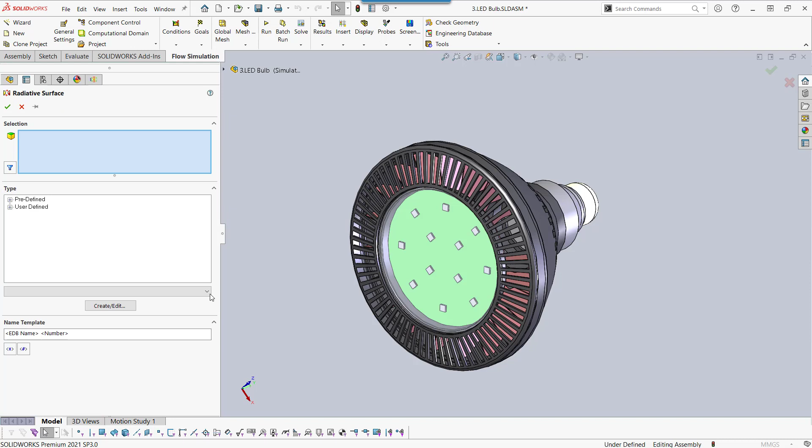Second step, and final step honestly, is setting up all your radiative surfaces. A radiative surface is essentially your emissivity from that face. The program does come with many defaults you can pick from. Be careful — it seems like, oh, it's aluminum, I can use that on this part file, why not? You need to be careful with what you're picking, especially in a case where this is sitting in an outside environment. This LED lamp is sitting outside as well as radiating internally, so it's radiating to the outside temperature and the inside temperature.

Okay, let's look at some properties here. In radiative surface type, there's a definition that says wall. Wall assumes any ray leaving the surface of this LED is going to hit some other component and get absorbed by it. If a ray coming off this thing doesn't hit anything, it assumes it gets reabsorbed back into this part. Does that make sense for something sitting outside? It doesn't, right? This LED is radiating out to the air, and it's getting absorbed by the environment. So it doesn't make sense to set a wall radiative surface to something that's an outside surface.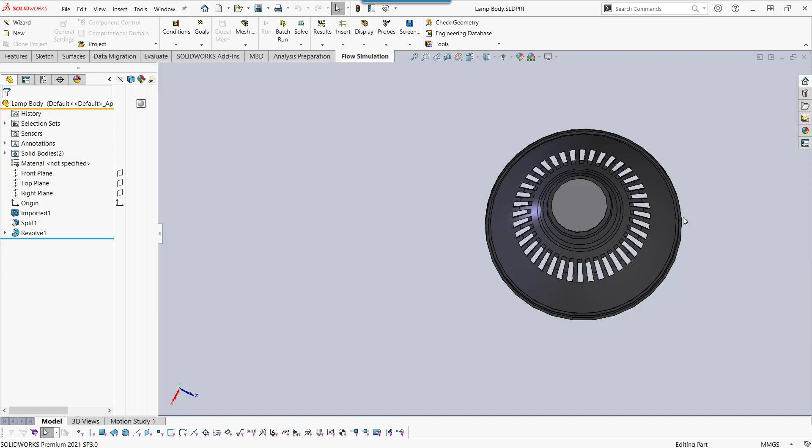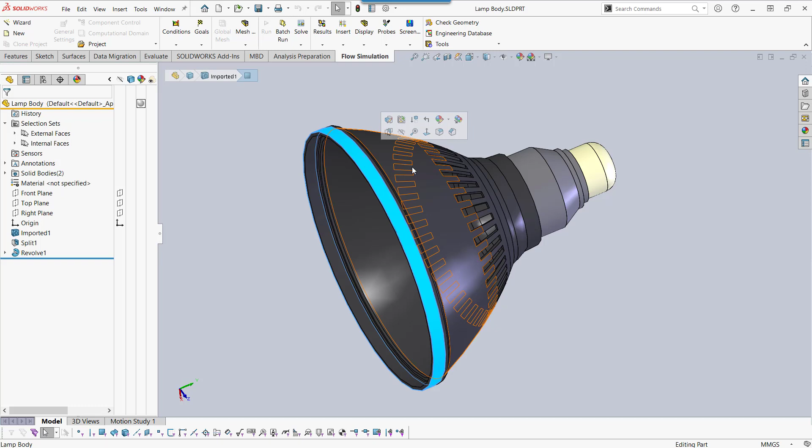So here, you would create something called selection sets. This is a SolidWorks thing where you pre-select all the faces you're going to want for something later, and then save it as a selection set so you can access it easily. You control-click whatever you want. If it's a face that has a lot of tangencies like this, you can right-click and say select tangency, which lets you quickly select a bunch of stuff. Once you have those selections made, right-click and say save selection, new selection set. You're able to build up these pre-saved things. If you want to add to it, just reselect, click a few more faces, right-click, update. That easy, okay?

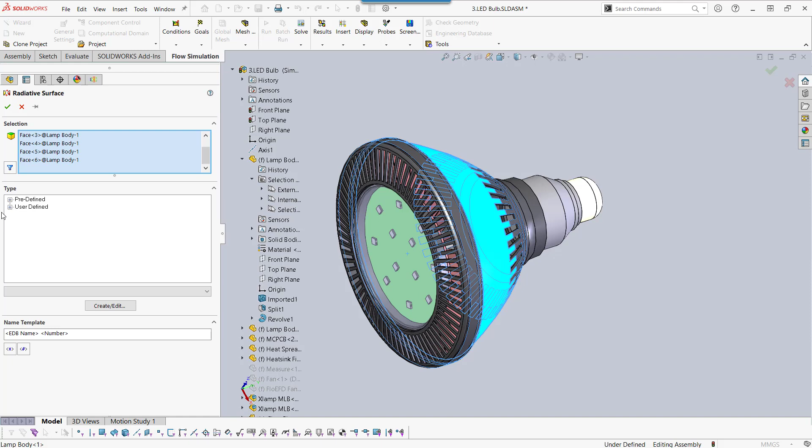So you build up your selection sets, and then back inside your main flow project, when you're creating your radiative surfaces, you dig down through your tree, find your selection set folder, and pick it. Now, I selected external surfaces here, so whatever predefined or user-defined choice I pick, it better be one that has wall to ambient properties. That is essentially the workflow. Then you would do it again for the internal faces, but set those to wall. If you do that with your radiation, I'm pretty confident you'll get very close to experimental results — you just need to be sure you have the right emissivity values.

I'm always good at just talking forever, so I'm going to stop myself and explain what initial conditions are, because this is fantastic. Somebody had asked for this. This is fantastic for time savings.

So initial condition, you saw a little bit of that with the tank. That's not what I'm talking about when I say time savings.

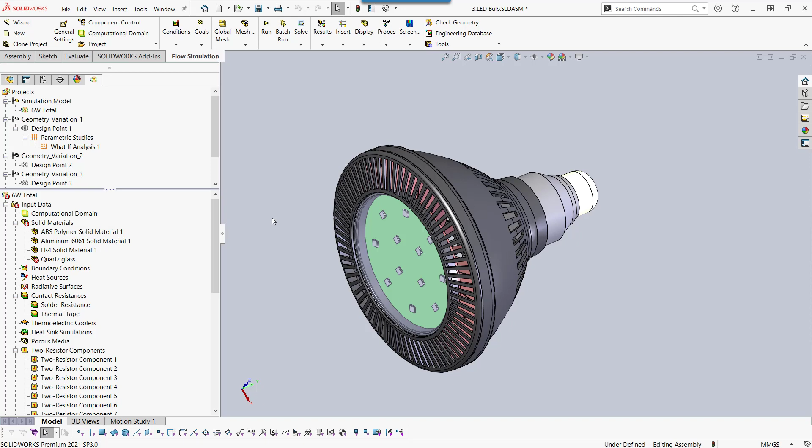I'm going to stick with this example because I've been using it. We had a customer in this chat right now talking about solar studies. And if I was going to turn a solar study on for this LED lamp, let's say the sun started at 8 o'clock a.m., it tracked across the sky until 1 p.m. So the sun's moving across the sky. What does that sound like? A transient study.

Transient studies inside of flow simulation are very time consuming. And I don't want to waste any time on analyzing 8 a.m. to 11 a.m. where this thing is just kind of chilling and heating itself up and kind of reaching a steady state. I don't want to waste time on that.

So we make a combo version of this. Right now, what I have solved, the 6 watts total, it is a steady state. There's no transient going on. We get to kind of a converged result of what it would look like if it's been on for a long period of time in a general temperature situation.

Then clone your study. Right-click clone. I'm going to call it my transient one. Okay, then you're going to go to your general settings, turn it to transient, of course.

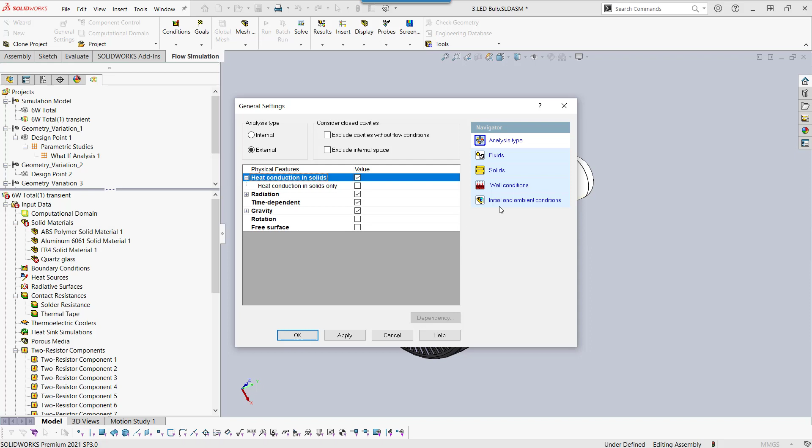Okay, now it's transient. Now here's the big thing. In initial and ambient conditions, where the transient starts at time equals 0, you can have that be equal to a different project. You would go to transferred, and you'd pick the flow simulation project you want to connect it to.

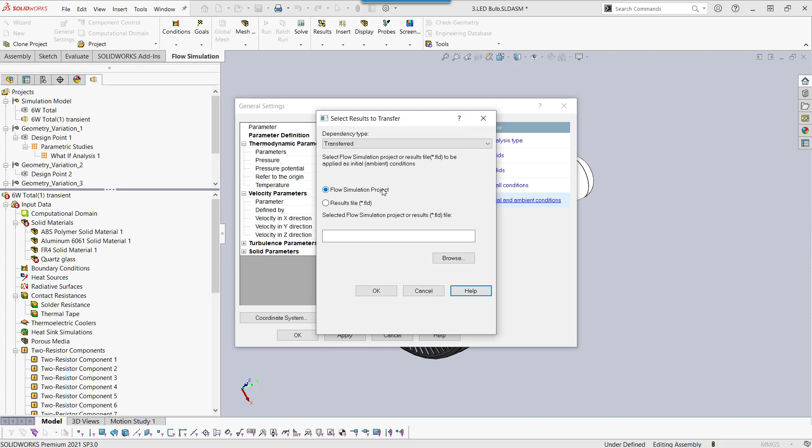Like my 6 watts total, that was my converged steady state result. It now ignores all of this stuff. It's using the defaults or the final answers of my initial project. And then it's going on with the rest of the transient analysis after that.

So then you only have to run 11 to 1. You don't have to run 8 a.m. to 1 p.m., right? Big time savings.

It works best for situations like this where you are trying to save time. So some sort of steady state connected to a transient state analysis. You guys have talked about emptying pressure vessels. Some free surface flow was a question here, and both are great reasons to take advantage of this trick.

Get to a steady state answer very fast, or with a bad mesh, honestly. Get a bad mesh going, get to an answer, and then refine your mesh and import your initial results, right? Just any way you can import results, save yourself some time.

Okay, and the last one that was requested was rotation and free surface. So let's hit that one at the end here. Kind of a workflow for that. By the way, this is brand new to 2021, so if you are using a version previous to that, you are not going to be able to do this type of physics. But 2021 is possible.

I have a mixer here. This is a tank with some blades that I'm going to set to rotate, okay? My setup is pretty similar to the tank filling or emptying that we looked at earlier. Let's look at those physics.

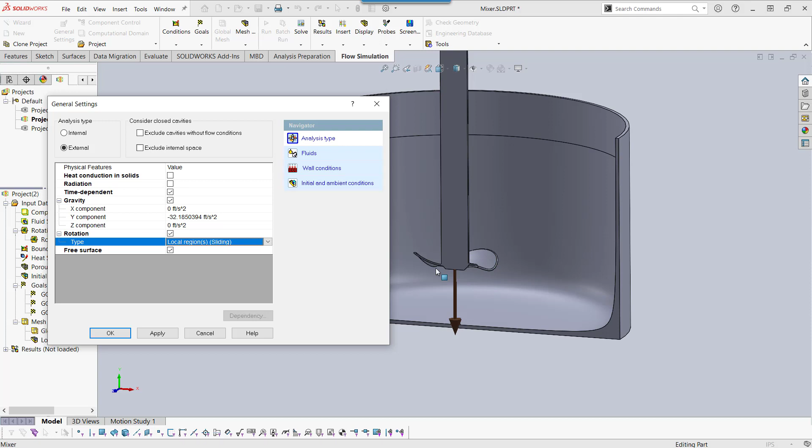So time dependency of X amount of time is going to be rotating. Gravity, of course, is necessary to keep the more viscous and heavy material lower. I set my sliding rotation. What does that mean? It's going to take those fan blades, it's going to physically move them in the fluid, pushing on the fluid. So it's physically moving the blades, pushing on the fluid. And then, of course, free surface is necessary for gas and liquid in the same chamber. So 4 sets of physics turned on here.

Under fluids, I have air from my outside liquid, and I turned on applesauce. It's a default non-Newtonian liquid that we have. I went with applesauce.

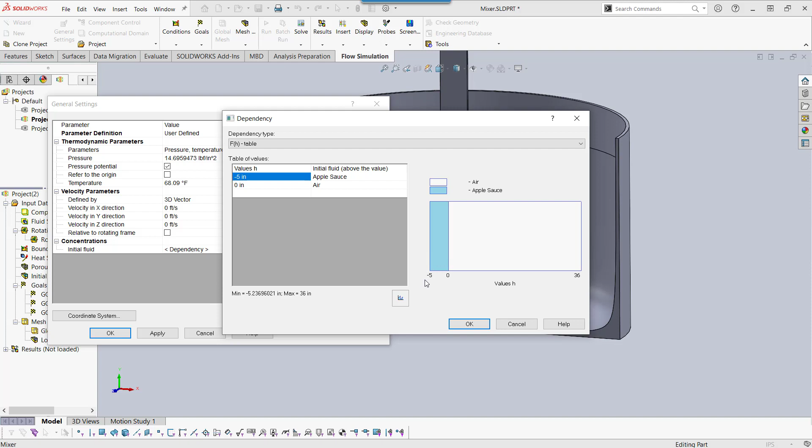Yeah, just kind of partially filling this mixer bowl. On my initial and ambient conditions, I did a little bit of a trick where instead of pre-modeling in the applesauce volume, I said everything below a certain height is applesauce. So from 0 to -5 inches, it's applesauce. Just a little speed trick so you don't have to model it in. Having done that setup, there's not much else to do inside of this piece.

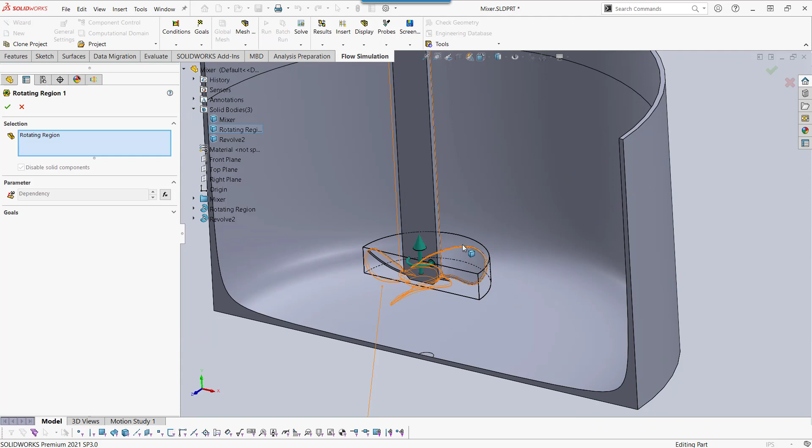There's this little special thing I did that's hidden. I modeled a little disc that goes around the fan, enclosing it. Anything this disc encloses is going to be treated as spinning at RPM. Anything it touches - you can't override any face. So if you have other faces sticking into this region that aren't supposed to rotate, adjust that rotated object's shape. In a lot of examples online from GoEngineer, we use discs like cylindrical discs, just because it's simple to model. You do not have to use a cylinder. It just has to be axisymmetrical, okay? It just has to be axisymmetrical.

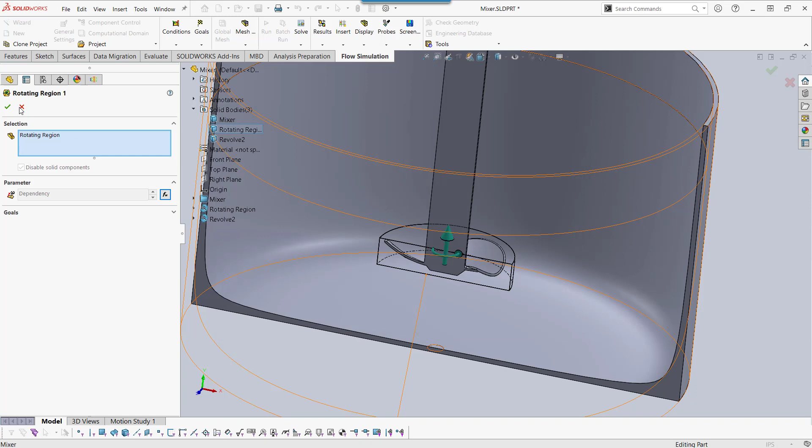From there, I set up an RPM. I had it spin up from 0 and then stay at about 250 RPM. What do the results look like? This is called Transient Explorer, by the way - it saves a bunch of little iterations throughout the course of the analysis. So you can kind of see that spin up and move that fluid.

Can you hear me? Yeah, I can hear you now. Oh, perfect. So my situation is I make my upstream pressure a time-dependent variable, so I inputted all of my pressures from an Excel sheet. And then my environmental pressure is the downstream pressure, which stays constant throughout.

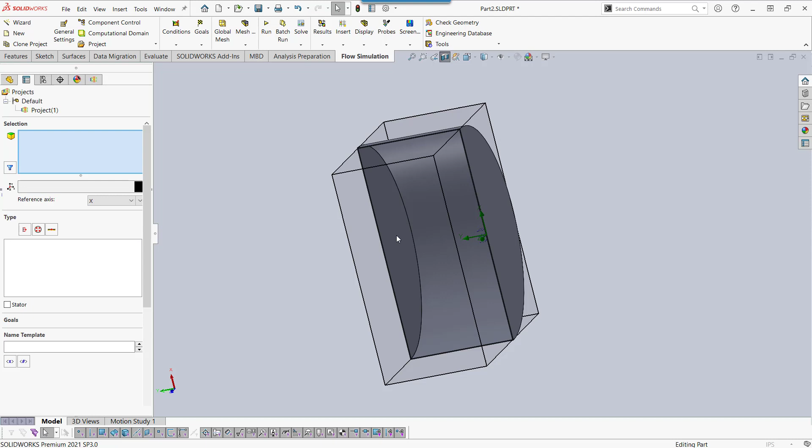And then through my simulation, after the simulation is running, my goal plots show the mass flow being negative and the velocity being negative, of that fluid. So something funky is happening where it's flowing backwards out through this inlet instead of going the correct direction.

Yeah, but when I do the flow trajectory and play that animation, the arrows are going in the right direction - it's just the graphs are dipping down. And it's staying constant. Well, the mass flow rate I would expect to change as the pressure drops change. I wouldn't expect it to go negative.

The pressures do allow any sort of directional movement. I guess the first thing I would look at in your case is I would do a surface plot on a face like this, on the inlet or outlet, and plot velocity in a direction, like the y direction in this case, so I could see if the majority of the flow is moving the way I expect, and if just some of it's curling back or something. So that's the first thing I would do - velocity in y, and then when I get my results, I would set a range like -1 to 1, for example, so there's a really clear delineation between red and blue, and then I would see how much of it is actually positive versus negative.

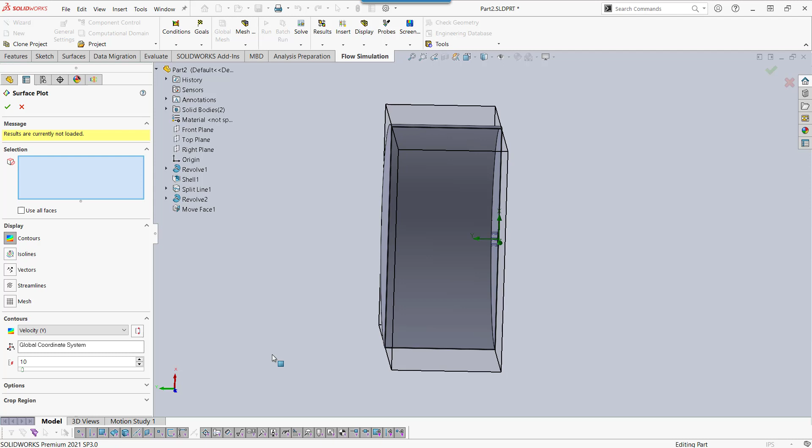That's the first thing I would do. The second thing I might do is concentric rings, or a grid pattern of some sort on the inlet and outlet face. That way I could get mass flow rates for individual areas. It could be another way to figure out whether it's more of a positive versus negative situation.

What's the main difference between the surface goal and the global goal? A global goal is factoring in every face or point in space, whereas a surface goal is, of course, just on a particular surface. All right, understood. Cool.